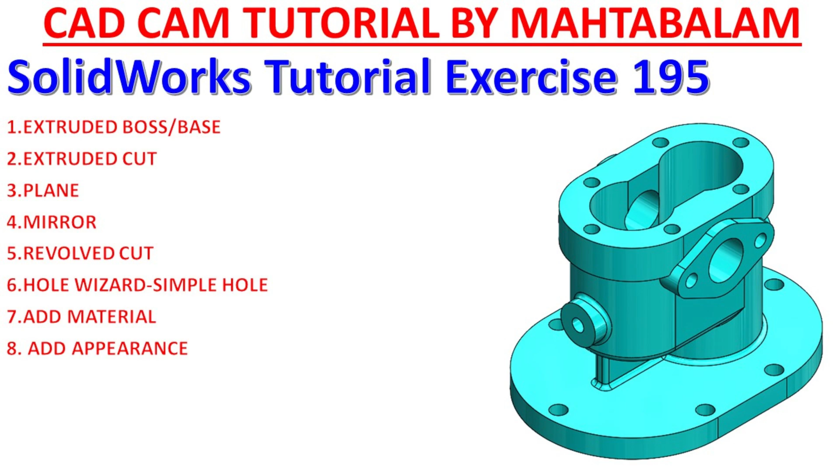Let's take one more exercise in SolidWorks. Exercise number 195. Note all dimensions are in millimeters. Fillets are 3 millimeters unless otherwise specified. Material alloy steel. Now here we have top view and right view.

So let's check top view. You will see this outer flange, radius 75. This is a kind of oblong body, and you will see the center distance for this oblong body. You will see this center line is going to meet. Look, the center line. So 30, 30, this is going to be center of this body, from this center to this center. If you see in view, 60 millimeter, and thickness you will see here 16 millimeter.

Then there is 6 number of holes. See, 6 number of 12 diameter throughout hole. See here, and the radius for this 64 millimeter.

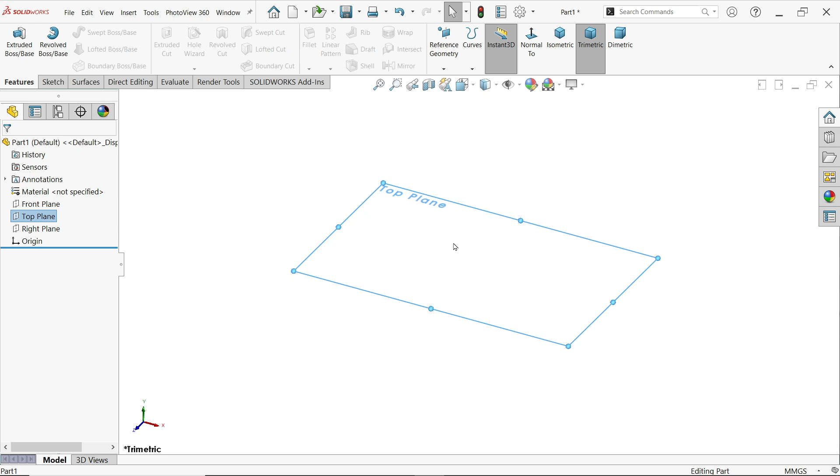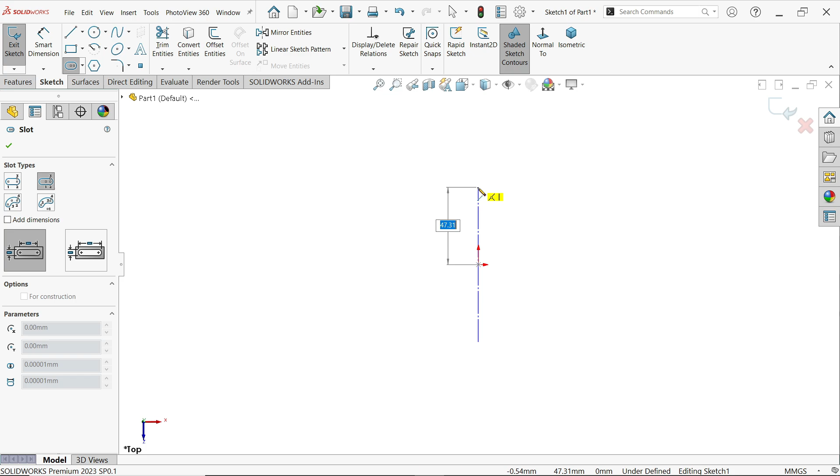Now first you have to choose a proper way, because I want to keep flange as bottom. So select top plane, sketch. Now activate here. Now we have to decide the origin point location. So I'll try to keep at center of the body. So here I am going to choose center point straight slot, and I am going to draw vertical. Drag, press escape key to out.

Smart dimension. Now these center distance 30 plus 30, 60. Radius 75.

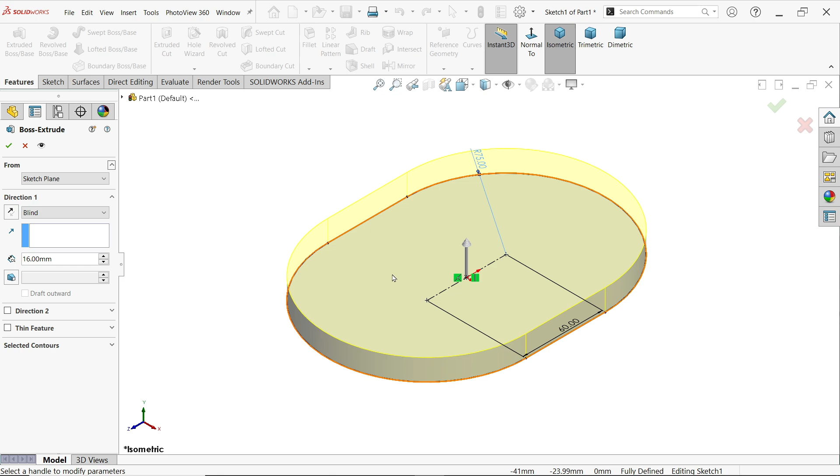Now go to feature and activate extruded boss base feature. Now look here. Keep start condition same, end condition direction 1 blind, and thickness 16 millimeter. See, this is moving upside. It's okay.

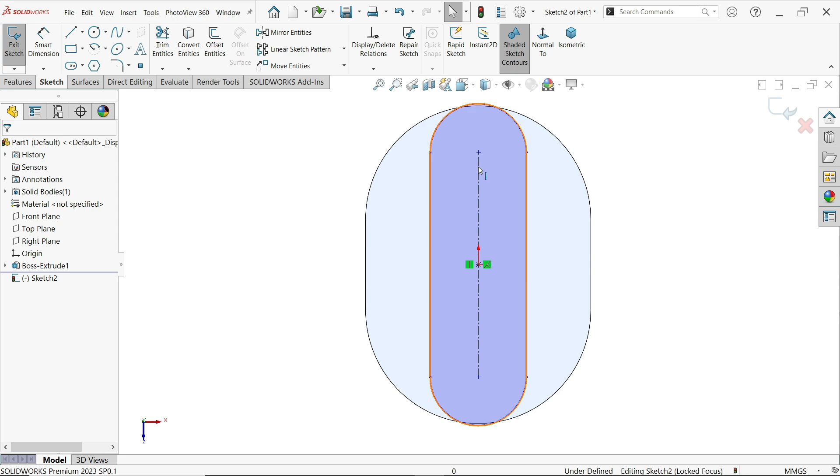Now select this face, sketch. Now again activate the same center point straight slot. Press escape key to out. Now select this one, hold shift key and select this outer one, and make one relation concentric. See, now this radius going to be 64 millimeter.

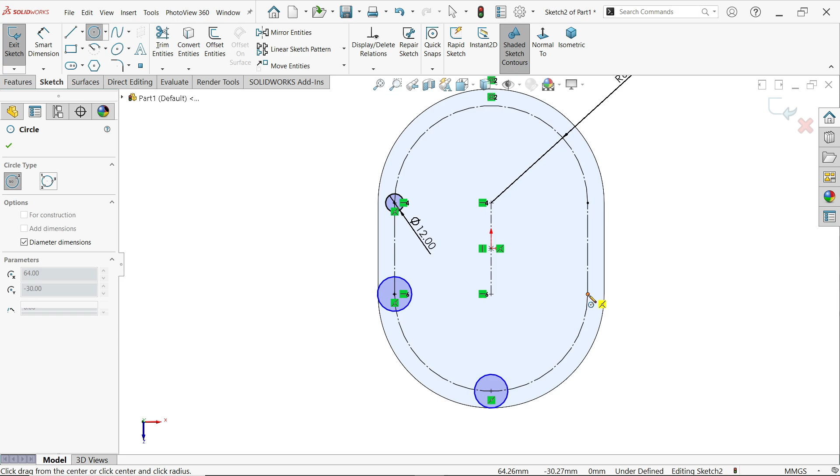Okay, now define this, select all, and here choose for construction. Okay, now activate here circle, and let me drop here, drag 12 millimeter. Okay, now just place circle at 6 location. I'm not going to use circular pattern because it creates problem, because this is not a perfect shape.

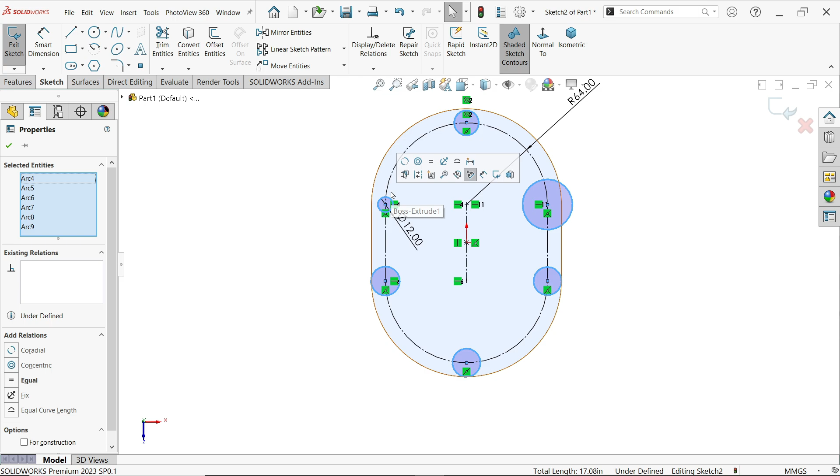Okay, now select, now hold shift key, select all the circles, and define one. And if you leave shift key, you will see this pop up, and at side you will see make relations equal. Say okay.

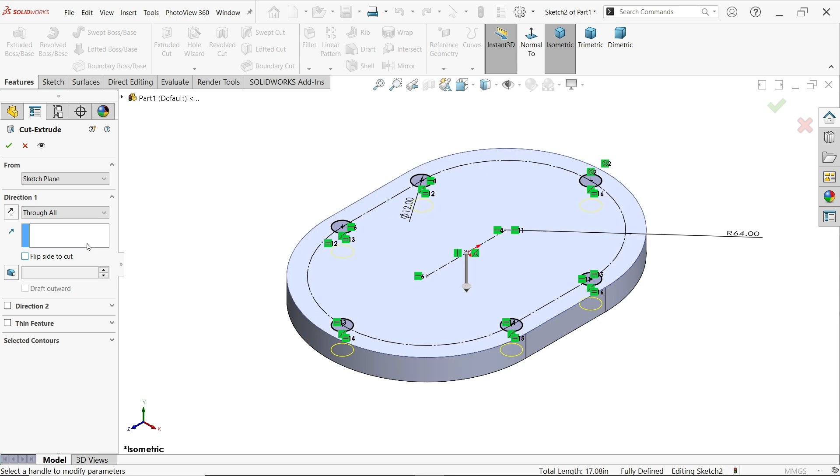Look, go to feature and activate extruded cut. Now by default system took this all. Keep end condition blind towards, even better to keep through all. Say okay, and it will cut up to through all.

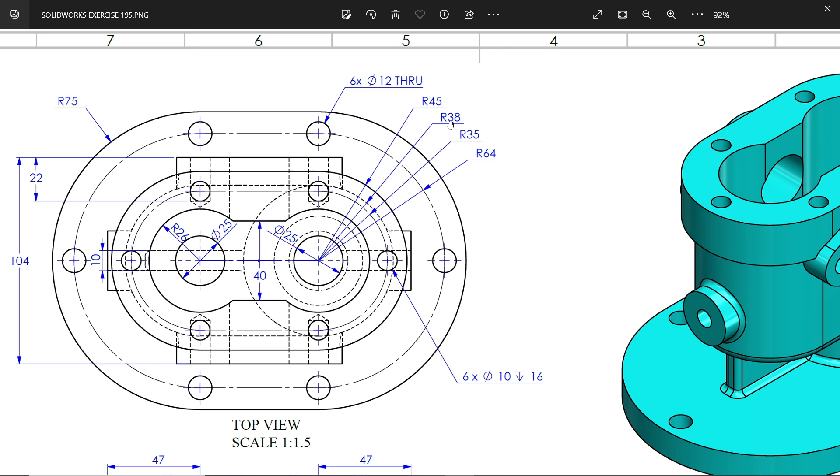At bottom 76 radius, this is going to be actually diameter. You will see from top side, you will see one dotted line. See, these radius 38 millimeter, and this is going to extrude up to from here to here. What is the dimension? 121 overall, and this flange depth 25. So if you subtract, 121 minus 25 is going to be 96 millimeters.

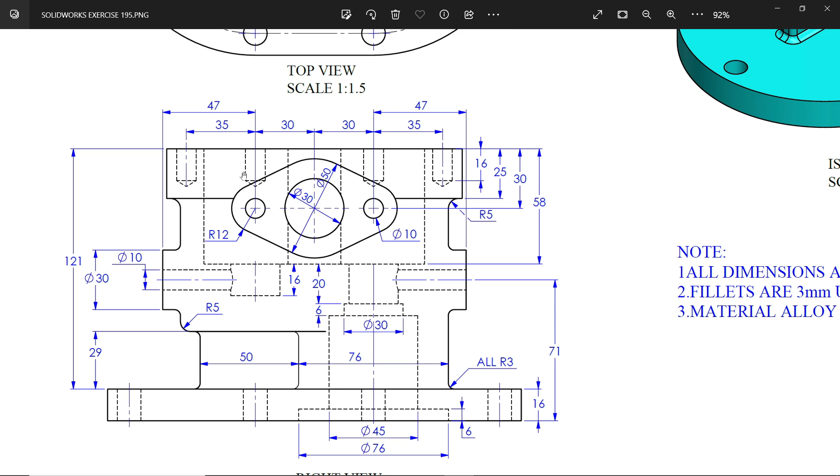See, then we will add this upper flange. See, upper flange. This upper flange, you will see this outer flange. This radius 45. Okay, and depth here shown 25. So let's do this.

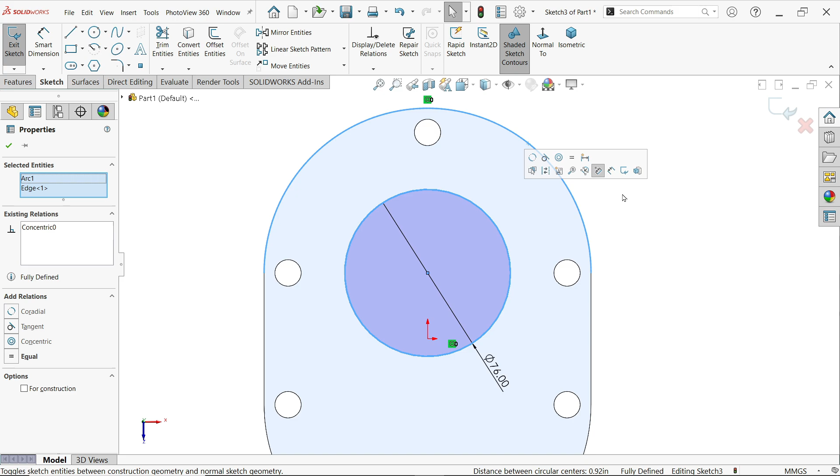Select this face, sketch. Now activate circle and draw 76, enter. Escape key to out, 76. Select this outer one and this one and make relation concentric. Okay, extrude. Now here distance 121 minus 25, 95, say okay, 96 actually.

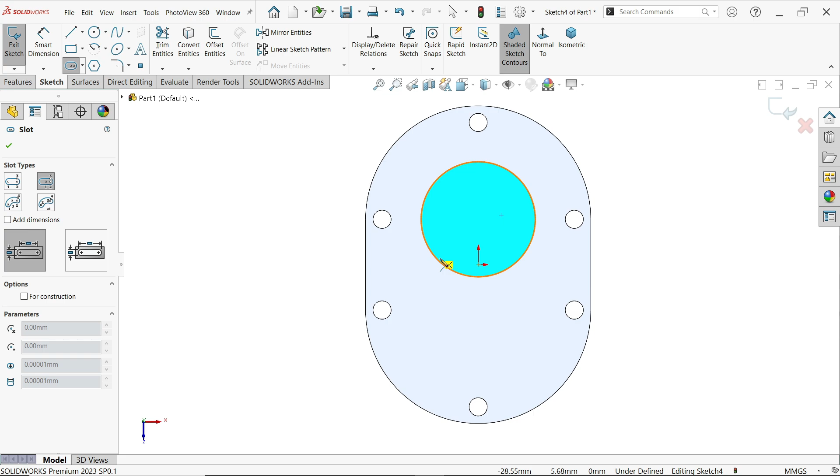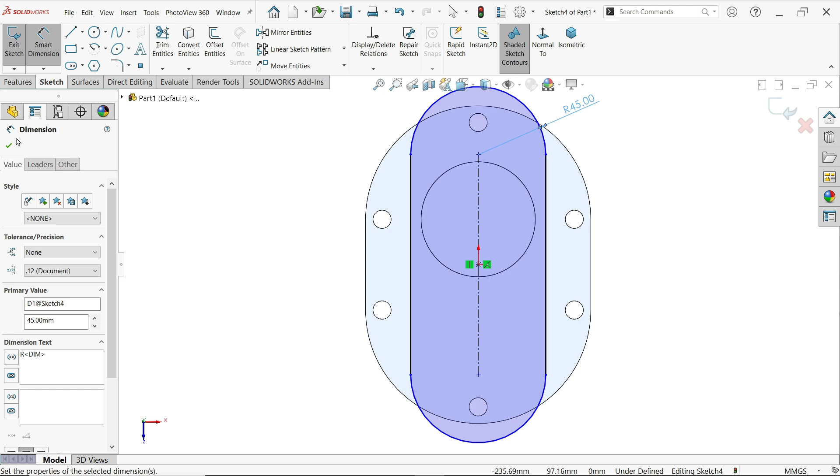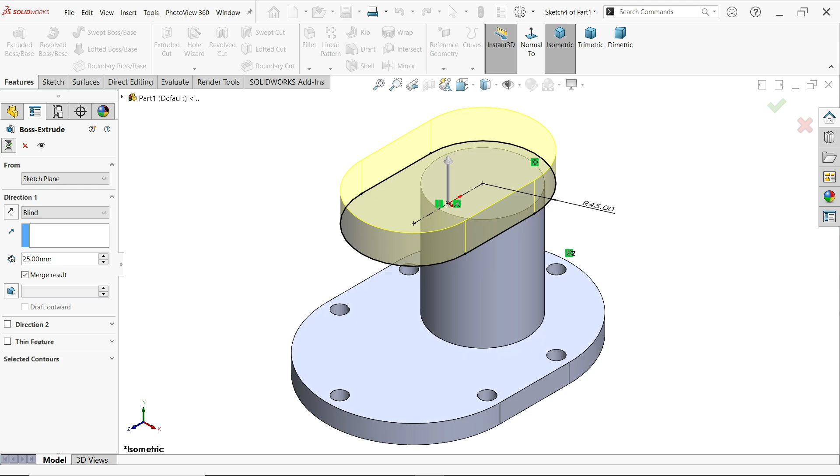Select this face, sketch. Now again I am going to select here center point straight slot. Okay, escape key to out and activate smart dimension, and the radius according to our drawing it's going to be 45. And one more important relation, hold shift key, select this outer edge and this outer edge, make relation concentric. Look, this is fully defined sketch. Extrude. And here depth 25 millimeters shown. Say okay.

Now come again. You will see at bottom 50 millimeter. This is actually a rib. If you see in top view, you will see this 10 millimeter rib. You will see this end of this shape. It's very small, but you will see with flange, with a corner fillet. See up to here. So this is a kind of flange, 10 millimeter.

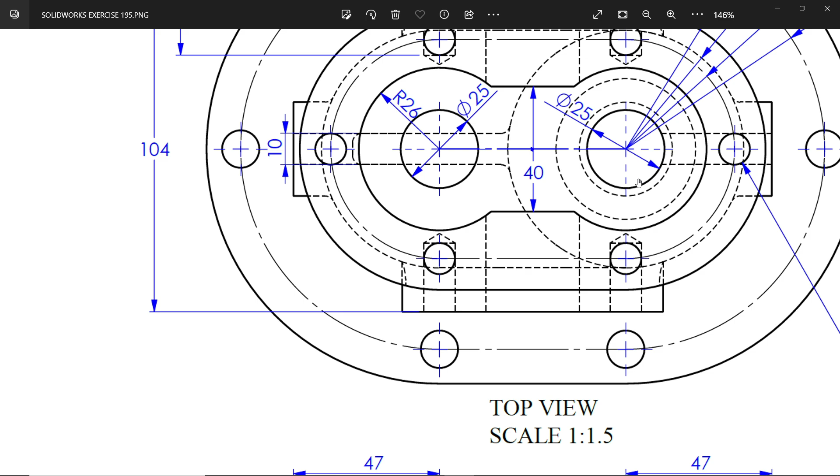Then after this there is one more body, and this is going to up to this 29 millimeter, and you will see this flange extend up to here. And those, if you clearly check, this is the dotted line, this is the body. See, this is going to attach with this outer body, which is radius 38. So remember this 50 millimeter, this rib 29 millimeter up to height, and this one second radius 38.

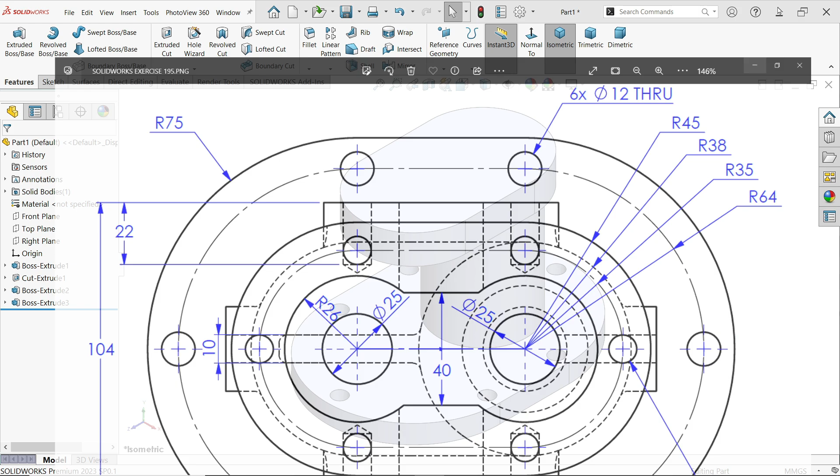Okay, so let me create one plane. Select this face, plane. Okay, now here put 29 millimeter.

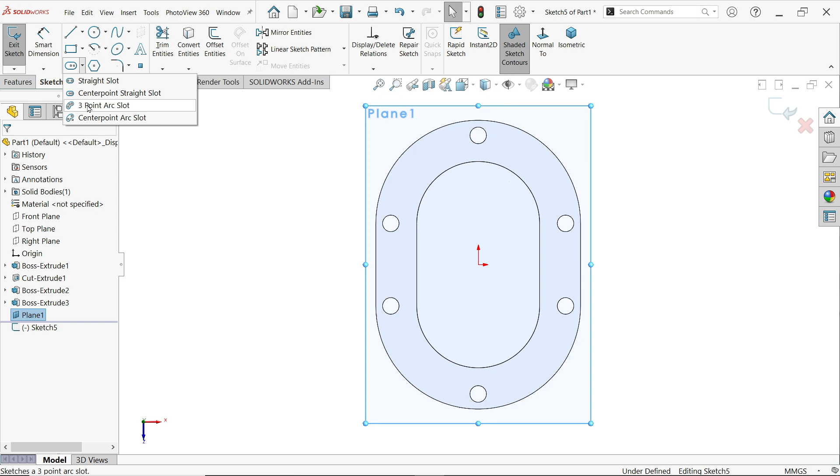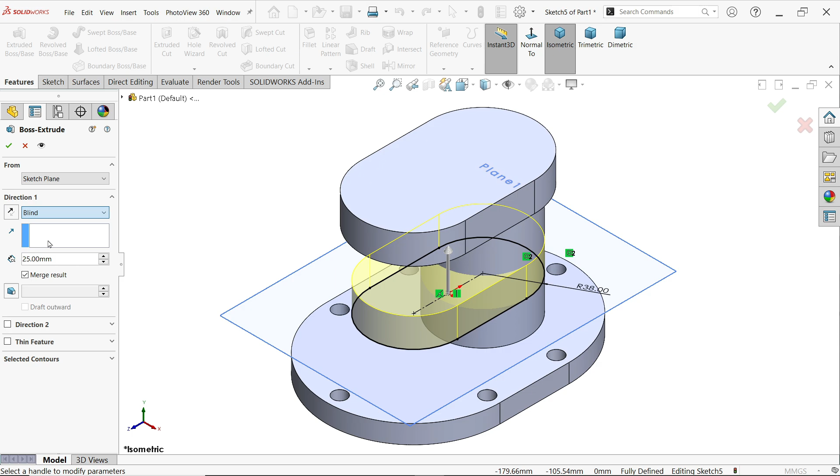Select plane and sketch. Now again activate center point straight slot. Escape key to out, smart dimension, and this is also radius 38. Now again let's select both the edges, concentric relation. Okay, now extrude. Now here select up to next, direction 1. Next means it is moving towards this direction, and the next this face.

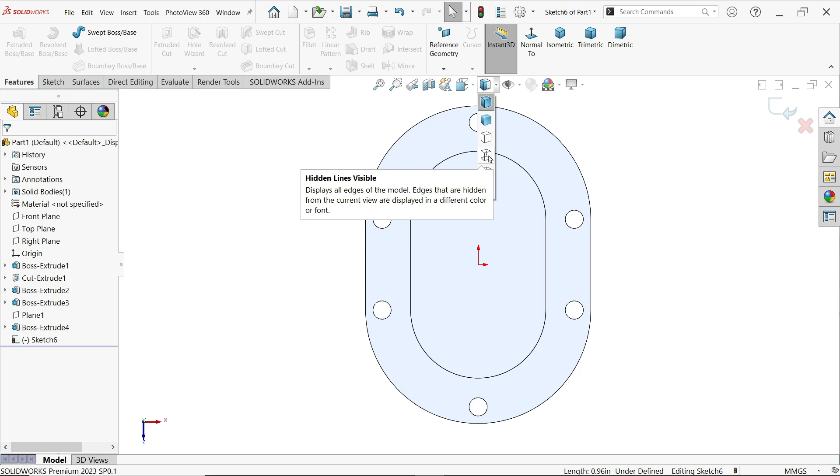See, click and hide plane. Now select this face, sketch. Now first I am going to change hidden line visible. Now here let me choose, okay, let's say corner rectangle. Okay, now let's do one thing. Hold shift key, select this endpoint and this one, coincide. Okay, smart dimension, depth or thickness 10 millimeter, and distance from the center point.

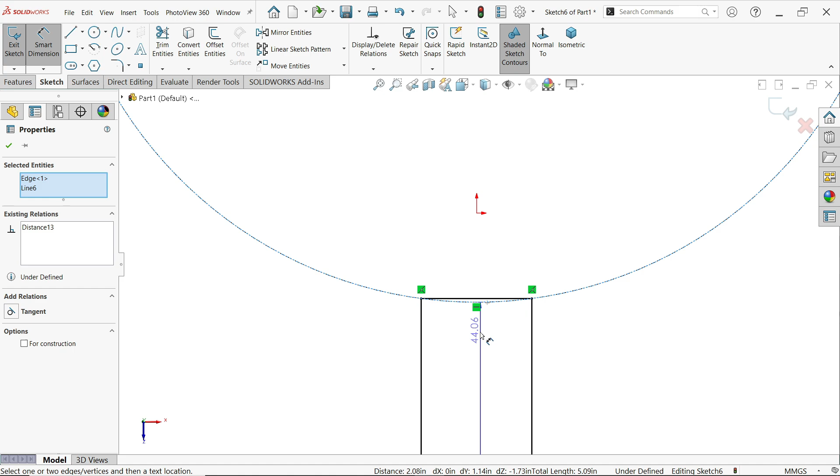Hold shift key and select this outer surface. Make sure you hold shift key, then you will get the distance from outer sharp edge, 50 millimeter. This is important distance. Don't take from upper side. Look, 50 millimeter, and this is located at center. Extrude.

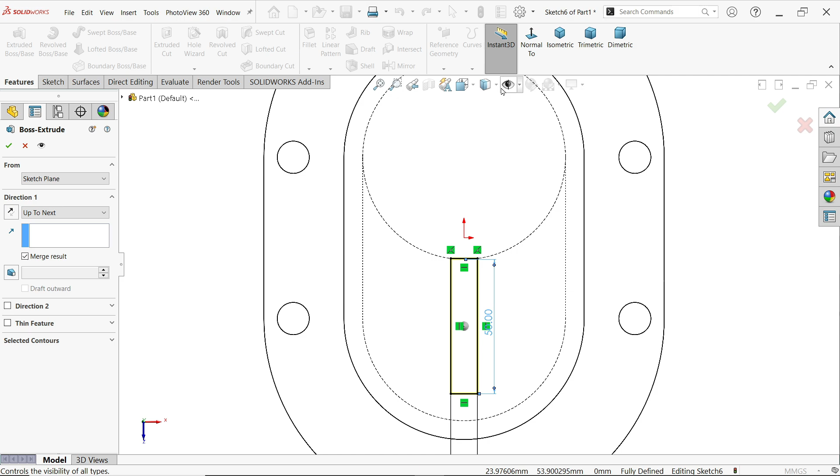Now, due to this body, this is not going to be chosen. So I am going to select up to surface and select this surface. See, this is extrude up to this surface. Make sure you merge result.

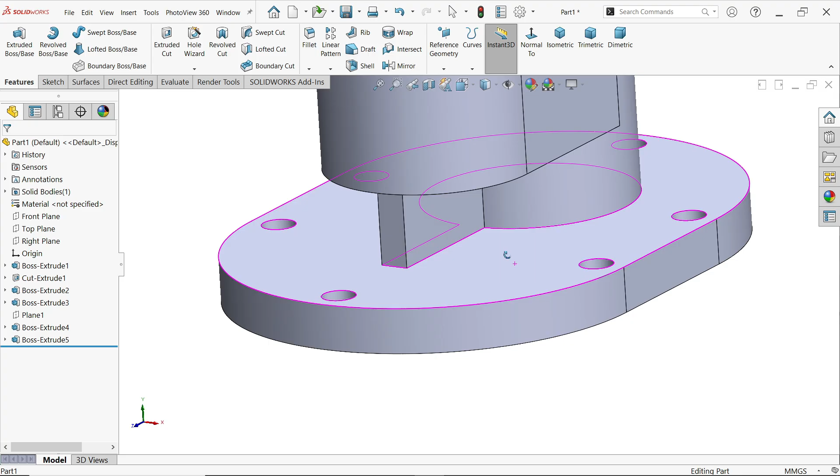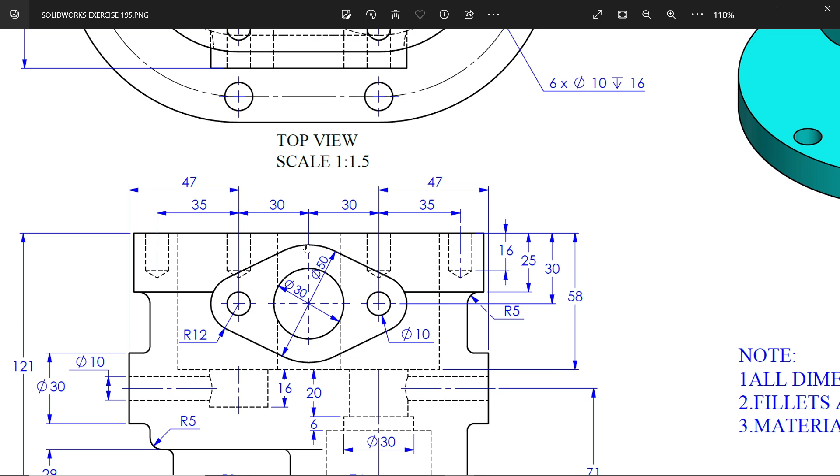You will see at top there is a cutout. Before going to take cutout, we have to make this flange. See, 50 millimeter, corner radius 12, inner diameter 10. These are we will make later, but first we will make this, and distance 30 millimeter from above, and this is located at center. And we have to see here, this is at both sides.

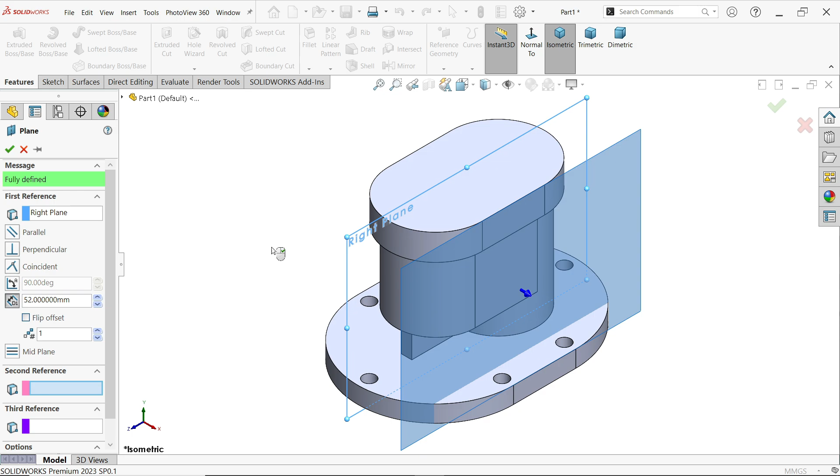Center distance 104. So first we have to create a plane. Right plane, plane, and here 104 divided by 2. Select the plane, sketch.

Now let me do one thing, make one center line. This is important. Now select the center point of this line, hold shift key and origin point and make vertical relation. Now let me define circle.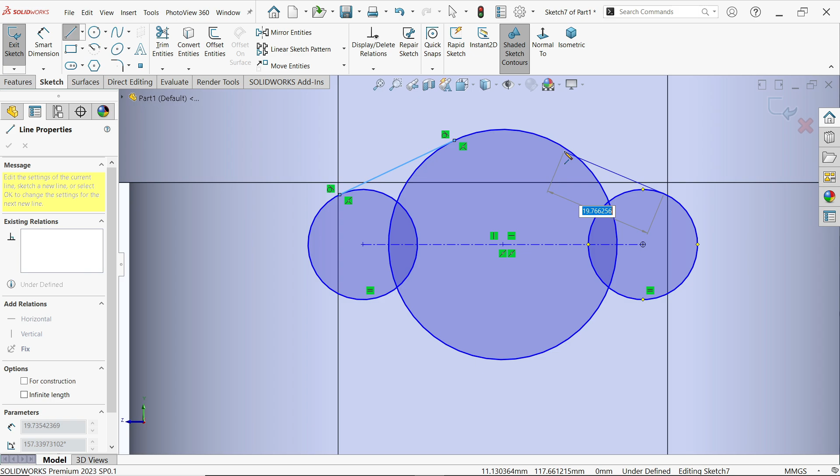Now select both circles, equal. Again activate line tool. Click and start and move cursor, and when you see tangent relation, click and exit. Again line, move, escape key to out. Mirror entity.

Now here select these two lines. Make sure we selected copy, mirror about. This is our reference line. Smart dimension, let me define this.

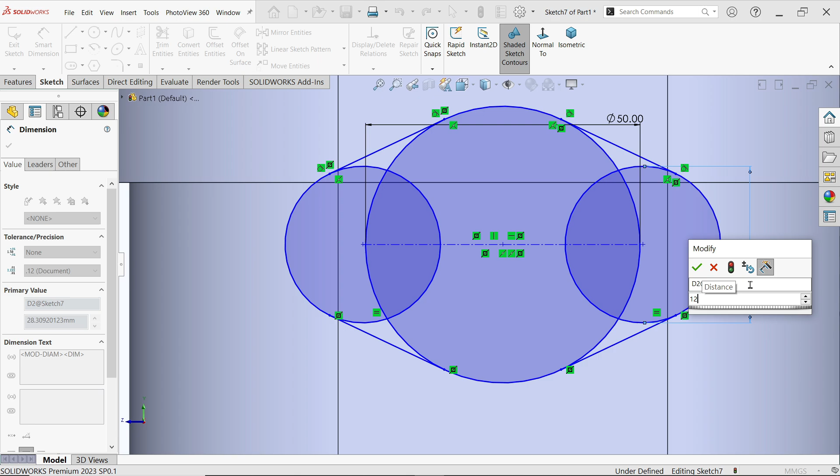Diameter 50. Now these radius 12 millimeter, so 12 into 2, 24 diameter, and center distance 30 plus 30, 60 millimeter, and this is distance from outer edge 30 millimeter. Look, this seems fully defined.

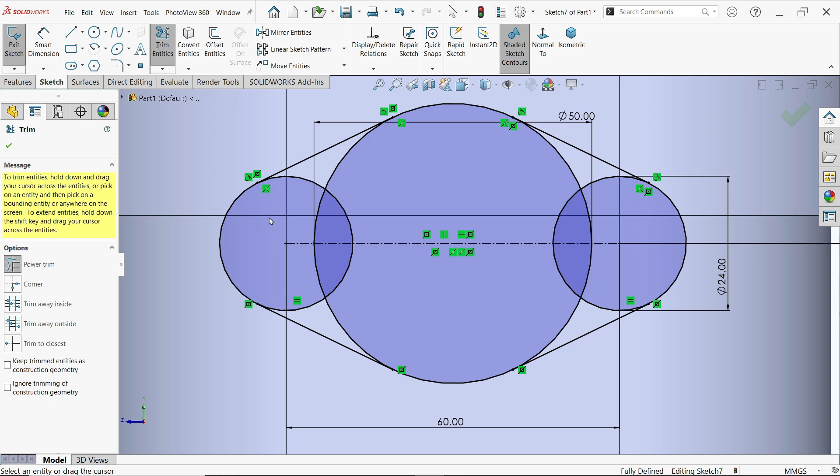Trim entity, power trim. Just press and hold left mouse and drag over the line which you want to trim. Press, hold and drag, leave. Again press, hold and drag, leave. Now we have one complete profile.

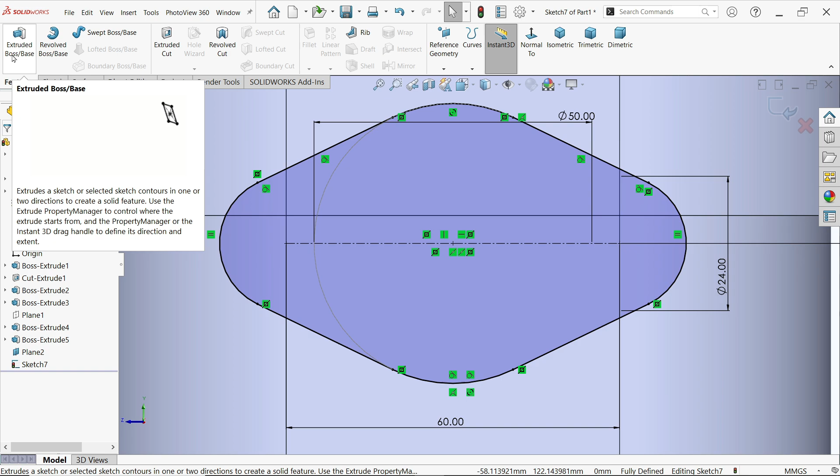Extrude. Now change direction, so here flip direction. Up to next, this is our body, up and down, so it will move up to this surface. Hide plane, look.

Now let's mirror. Reference plane, drop down, right plane, and feature to mirror. Directly select this. Look here.

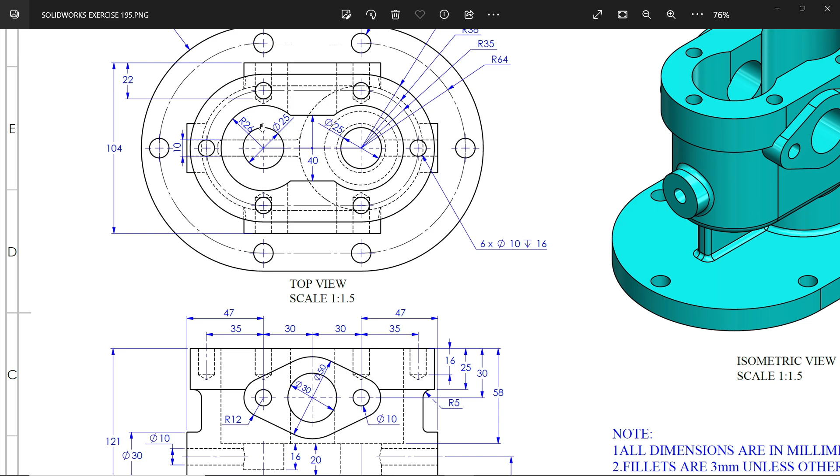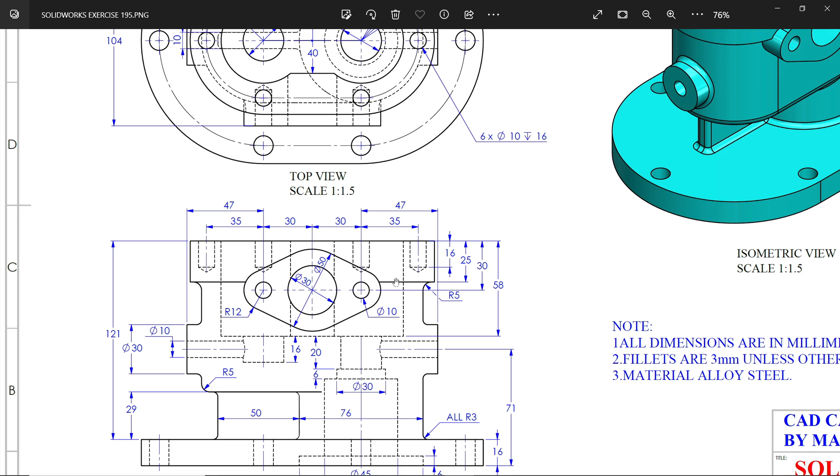Now you will see from upper side 40 millimeter, 26 radius, and this is also located at the center point. You will see a dotted line. This is a kind of cutout inside, and this is the depth, inside depth. So let's do this: 40 millimeter, 26 radius, and the depth here 58 millimeter.

Sketch. Let me do one thing, I am going to make circle. 26 radius, so diameter going to be 52.

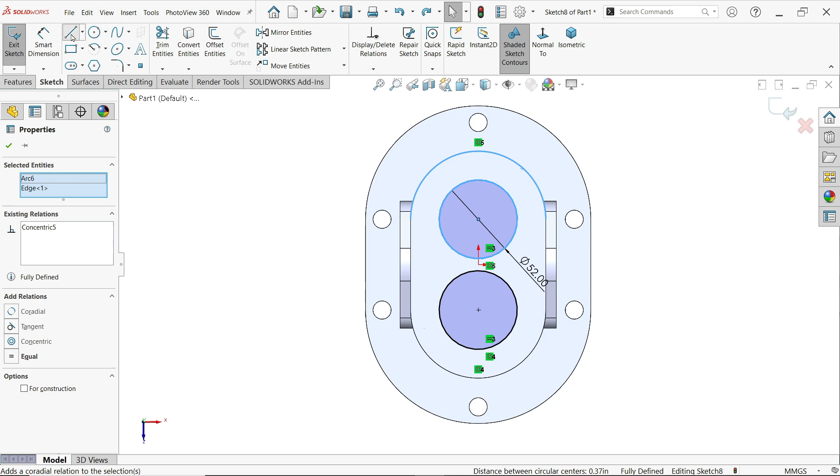Make relation concentric. Undo. Make relation equal. Then press and hold shift key, select these two edges, concentric. Similarly for other side, concentric. Activate line tool, draw one line.

Now I am going to draw one center line for reference purpose. Make sure it is vertical. Now select both the lines and click mirror entities. See, this is directly mirror.

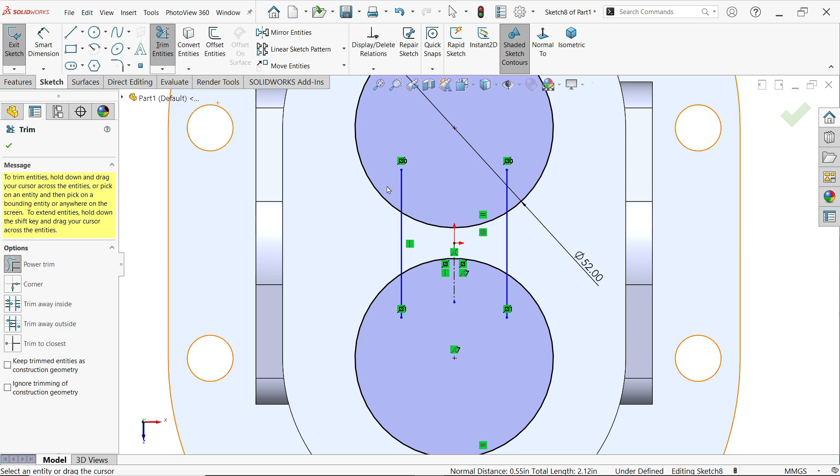Trim entities, power trim, press and hold left mouse and drag. Now let's define the center distance, 40 millimeter. Okay, this is unbalanced, so let's define half of the 40, 40 divided by 2, it's 20. Now this is balanced, this is fully defined.

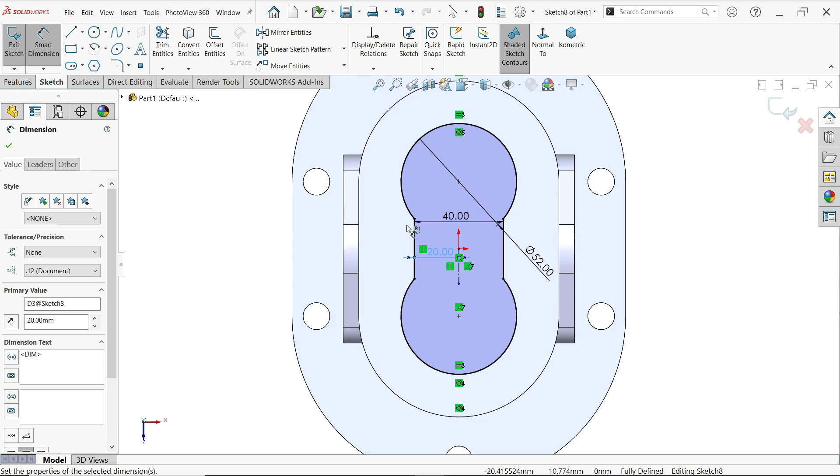Activate extruded cut feature. Now depth is not through all. Keep end condition blind, and depth according to our drawing it's 58 millimeter. Say okay, see here.

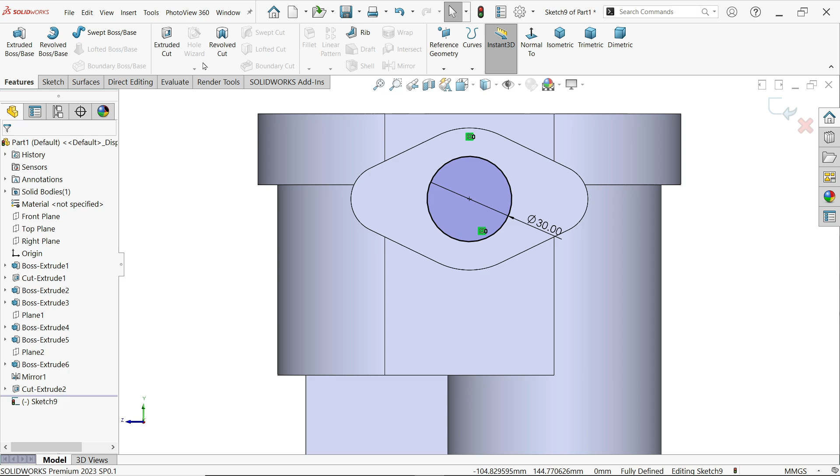Select this face, create a sketch. Now here we have one through-hole, so I am going to create one hole, and this diameter was 30 millimeter. Select this outer edge, this one, concentric relation. This is fully defined sketch. Again activate extruded cut, and this time I am going to choose through all.

That's it. Now at bottom we need to make some cutout. You will see here, inside there is a hole 25. Then there is a dotted line, one more hole. Then one more dotted line, this is one more hole.

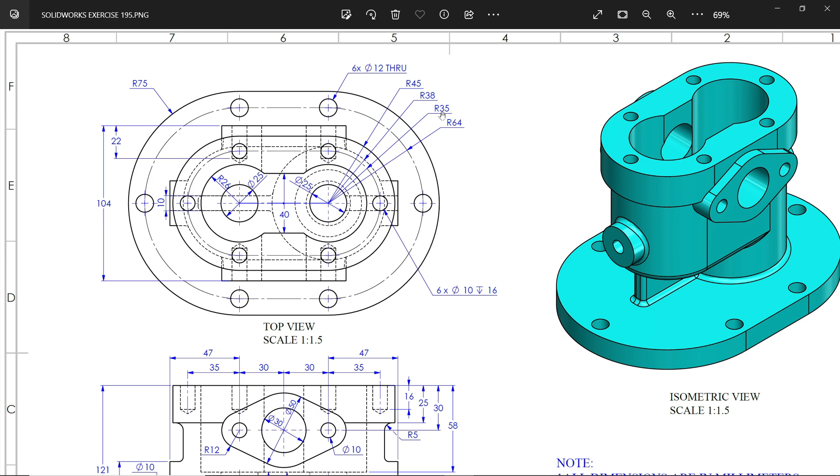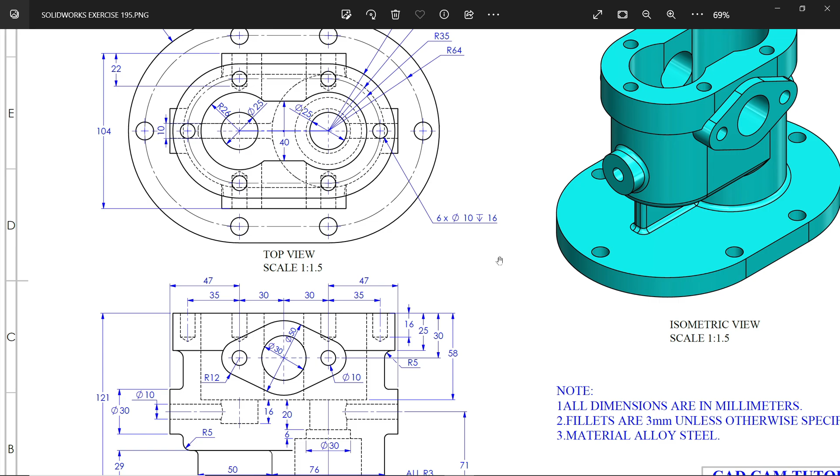35 radius shown here, see dotted line. This is the line for these holes. These hole locations, where you will find, see here these holes, 16 depth, and you will see here 6 number of holes, 10 diameter, 16 depth. This is a kind of hole. So let's make those holes.

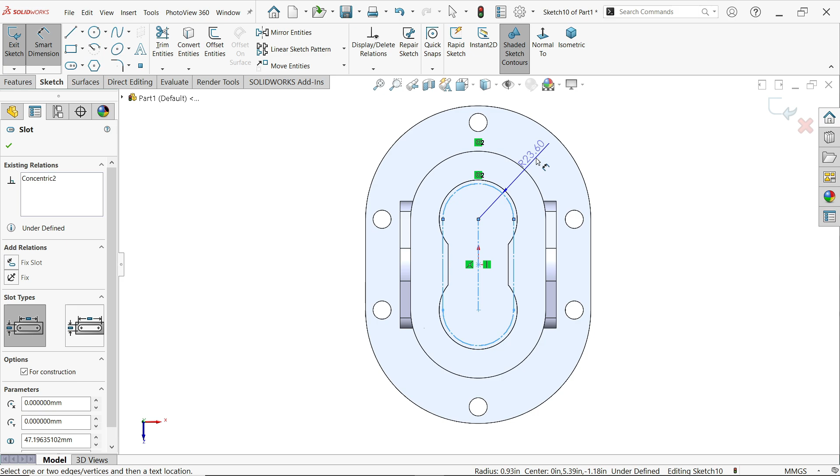Center point is straight slot. Concentric relation. Now select this and define for construction and radius. Now this radius is 35 millimeter. Now exit.

Now go to hole wizard. Now select here hole, see, this third option is hole. Standard metric, drill size, and here I am going to define 10 millimeter, even though show custom and change from here. Depth 16 millimeter, fine. Okay, rest I am going to choose depth up to shoulder.

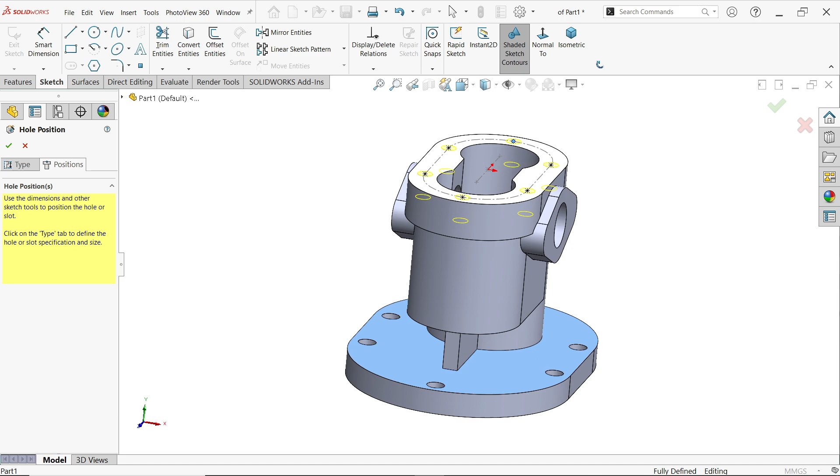Position. Now you have to choose any surface, so I am going to select this. Now see, this is activated. Just place, click and place. Click and place. Press escape key to out and just rotate, and you will see the preview. Look, the hole is created.

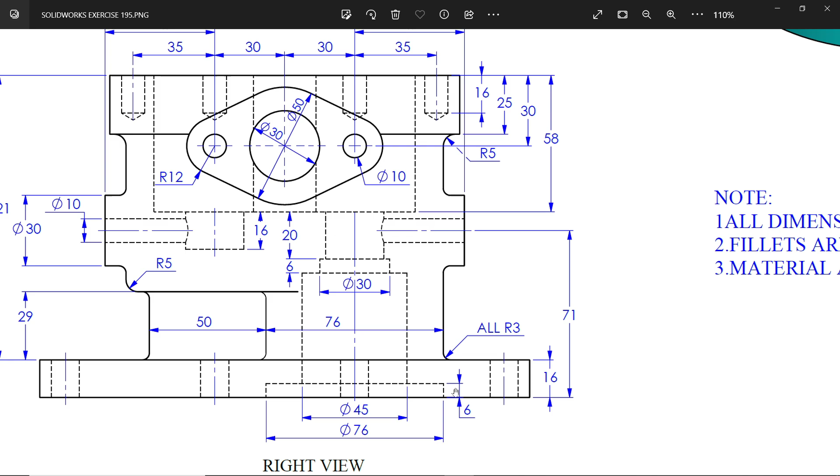Hide. Look, at bottom there is one cutout. See this diameter 20, depth 6 millimeter, 30 millimeter this diameter, and this diameter 45, and the outer one 76, 6 millimeter from here, and this diameter you will see from top 25. So let's make those first.

Right plane, sketch. I am going to choose this one. Now you will see dotted line, center line. Just create one center line.

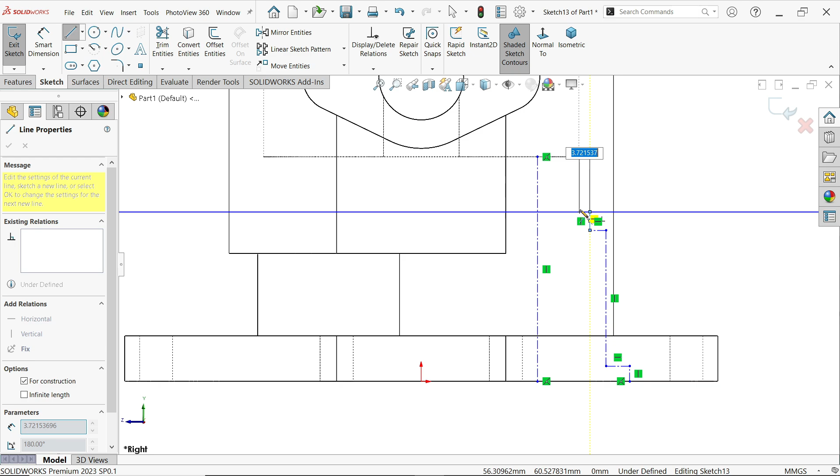Connect with this and connect up to here. Press escape key to exit, and do one thing: select these lines, uncheck construction for this one, and keep this one as a construction line so that we will get the diameter. Okay, let me define this diameter.

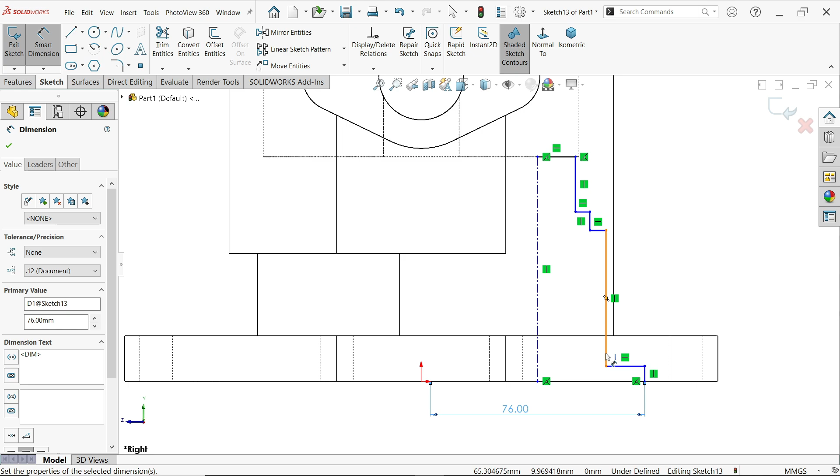If I move cursor here, 76. Ø45, Ø30, and this is going to be Ø25. Okay.

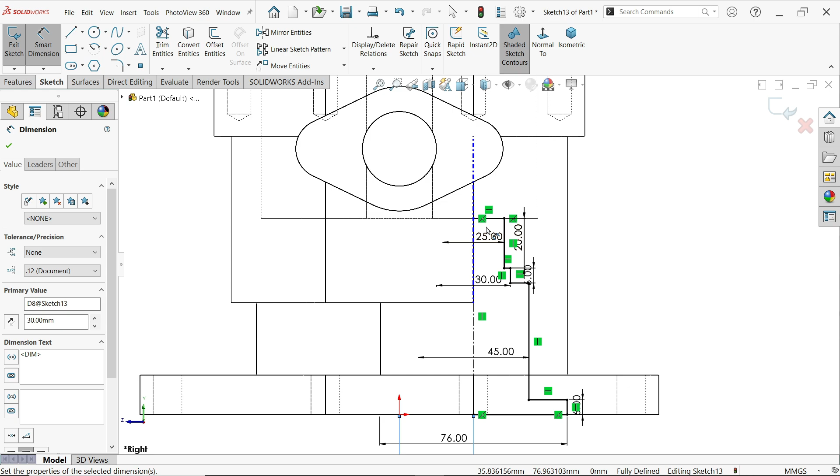Select this one, press escape key, 6 millimeter. Okay, come down, 20. This is also going to be 6 millimeter. Okay, still there is one undefined. This lies at center, so from center to this distance, 30 millimeter. Look, see this, it seems like a fully defined sketch.

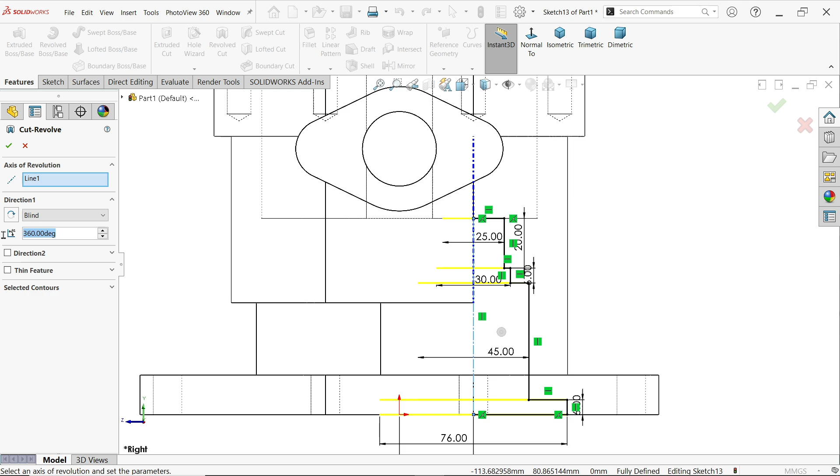Okay, now activate revolve cut. Now see, due to this construction line, this is an open profile, so it is asking you: would you like the sketch to be automatically closed? Say yes. If you say yes, axis of revolution is already detected by the system, and keep it a 360-degree cut. I am going to show you.

Okay, see the proof. Okay, if I am going to say right plane, section view. Okay, and look, this is our view.

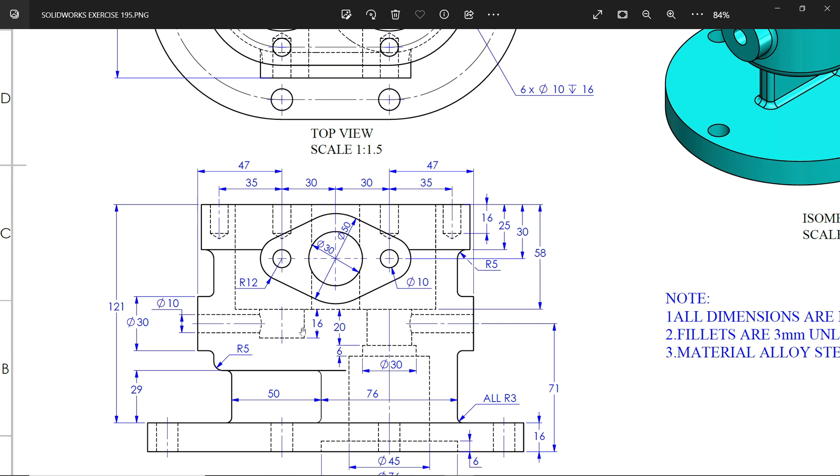Now again in a similar way, there is one more cutout, 16 depth and diameter 25. See here. Then we will make these bodies. See, 30 diameter and 47 millimeter from this end. So 47 plus 30 is going to be 77 millimeter from center on both sides. See here, and there is a hole, and this hole is going to cut up to this.

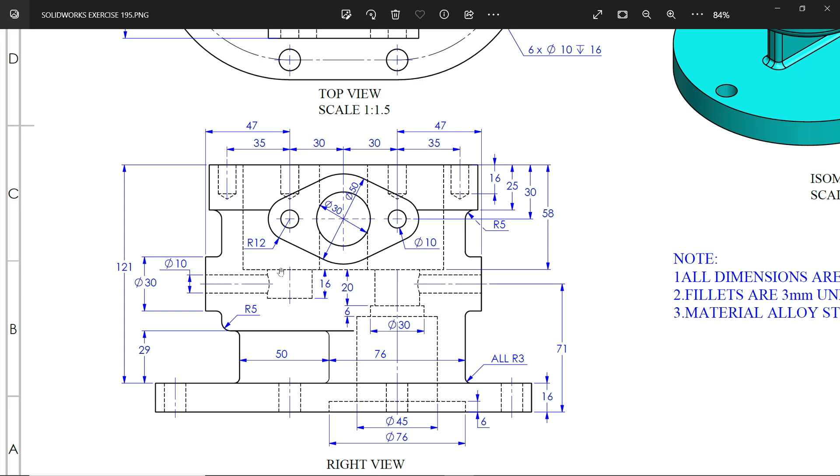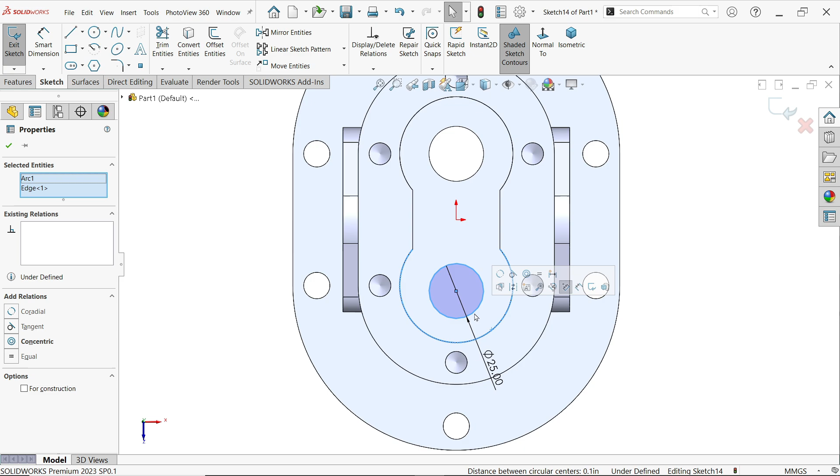So the hole we can directly make from here. Sketch, activate circle, 25, enter. Press escape key to exit and select this, hold shift key, concentric relation. See, now activate extruded cut feature.

Now see, this is moving towards downward direction. Keep it blind and register the depth as 16 millimeter. See the preview. Okay.

Let's create one plane. Right plane. Now first reference plane we choose front plane, and here we put dimension 47 plus 30. Okay, now select the plane, sketch. Now make one circle here, diameter 30, enter. Press escape key to exit, and center distance from outer edge is 71 millimeter according to drawing.

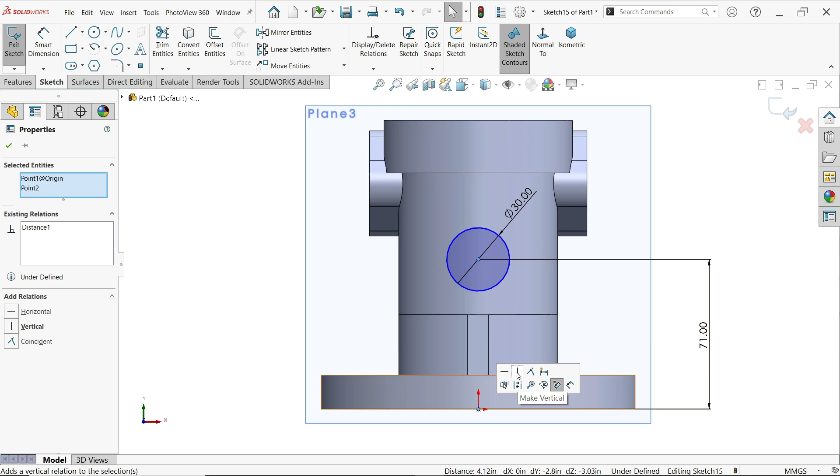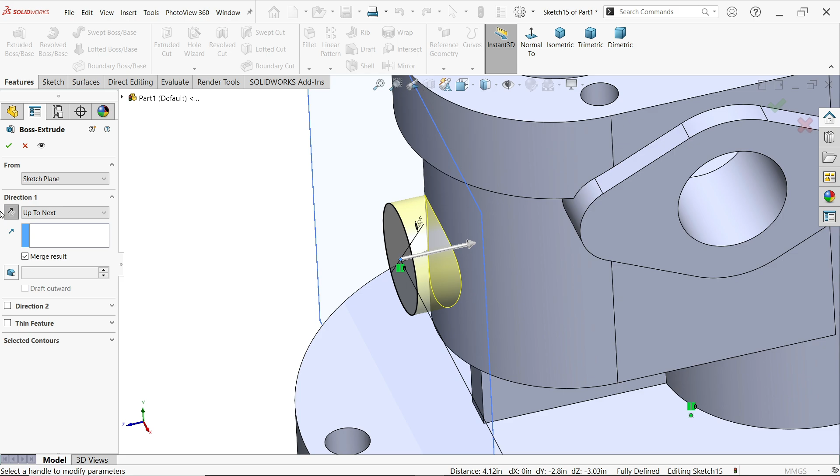Vertical. Now see, extrude. This is moving in the wrong direction. Change direction, and here choose up to next. This next is this circular face. Okay, and here we go.

Hide. Now it's easy for us to—now I want to mirror this. Okay, before going to mirror, I am going to make a hole here. Okay, let's make a hole.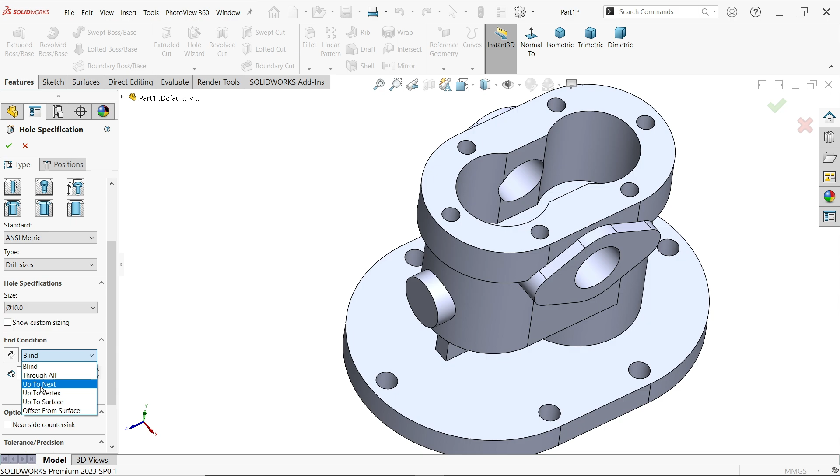Drill size is 10. Condition, I am going to choose up to next. Position, select this face, move cursor, and keep cursor outside the edge. You will see center point. Just click and place, press escape key to exit. Just check the preview. Say okay. Now look, the hole is created up to end.

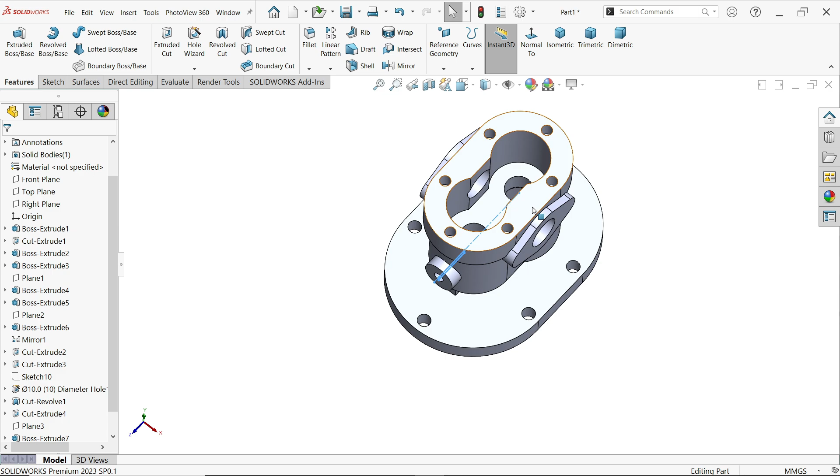Now we have to create the same way. Now let me choose mirror, reference plane front plane, and feature to mirror: select this one, and select the hole also. Say OK. Now look, it's time to choose right plane and section view. OK. Now look how our holes are created inside. See.

Okay, now let's check what else is left. Okay, there is a corner radius R5 and R5, and rest all R3. See, this corner has it, these corners have it, and see, these corners also have it. See here.

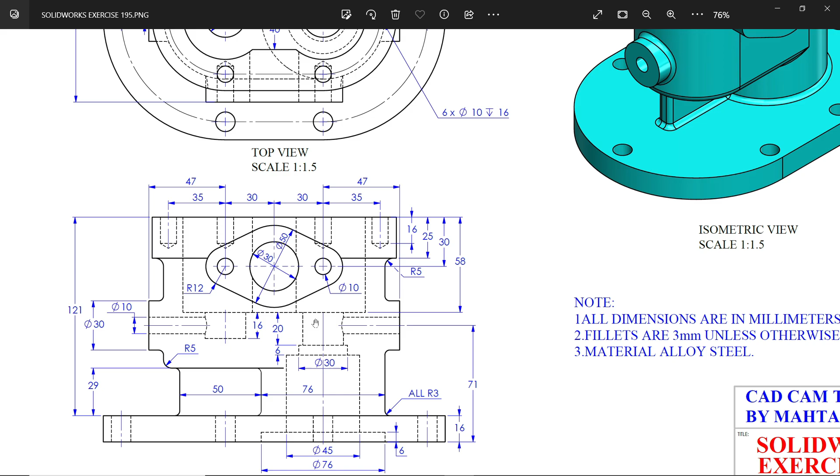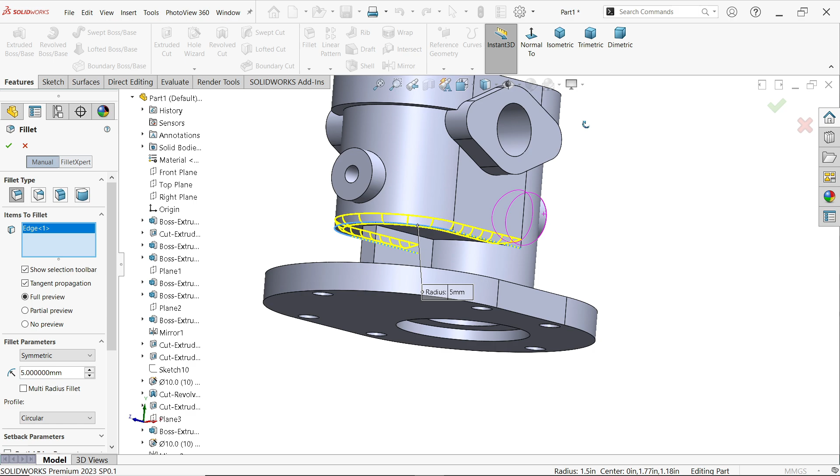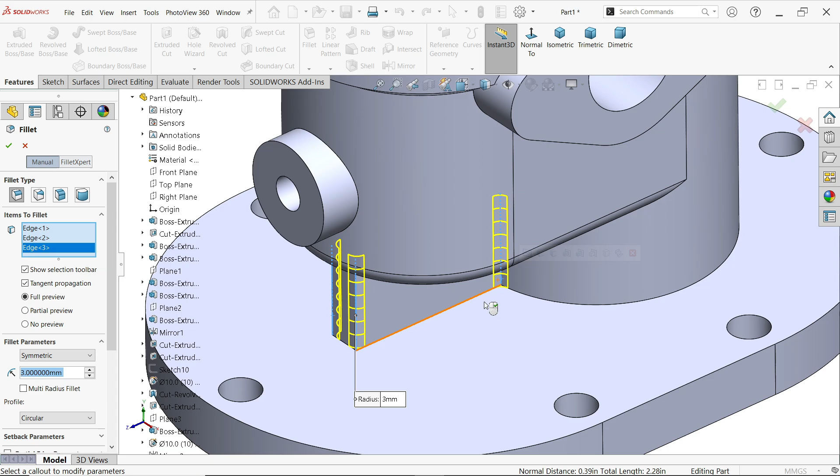Fillet type constant size, fillet parameter symmetric, and radius I am going to keep 5 millimeter, applied to this. Select this corner and this corner, only these corners have 5 millimeter radius. Okay. Fillet constant size, this time 3 millimeter, and first I am going to choose vertical edges so that the vertical edges look better.

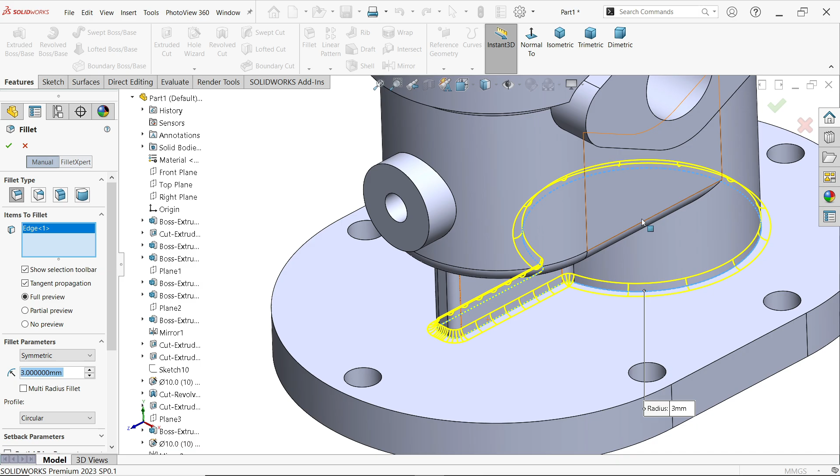Now select these corners, delete. Let's make it in a second round. Now same thing—if I choose, see this, due to this vertical circular reference, it's going to take all the edges together. Now at the bottom also, if I choose any one, see, this took all the shapes. Select this corner and this corner. Say OK.

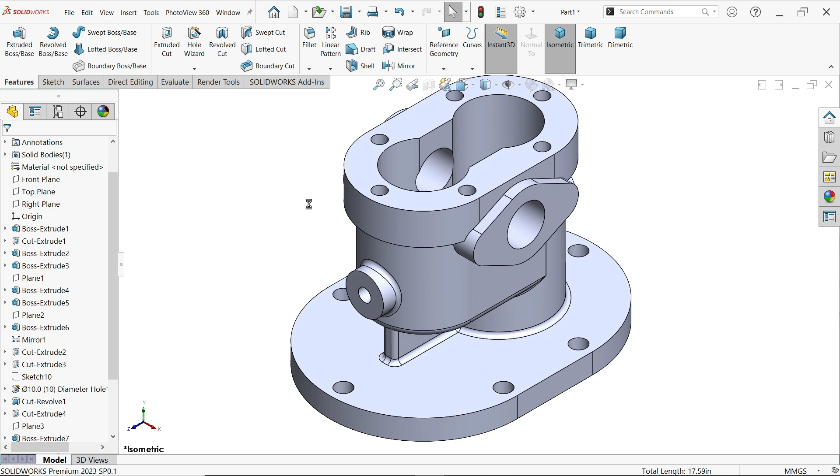I am going to turn on real view. Material, right click, edit material. From here you can apply alloy steel. See, this is alloy steel. Apply. You will see all the properties of the material. Close. And for a look, you can change appearance and scene decal. Go to appearance, normal, and here there's an option called edit appearance. Now from here I can change the color. Okay. Look.

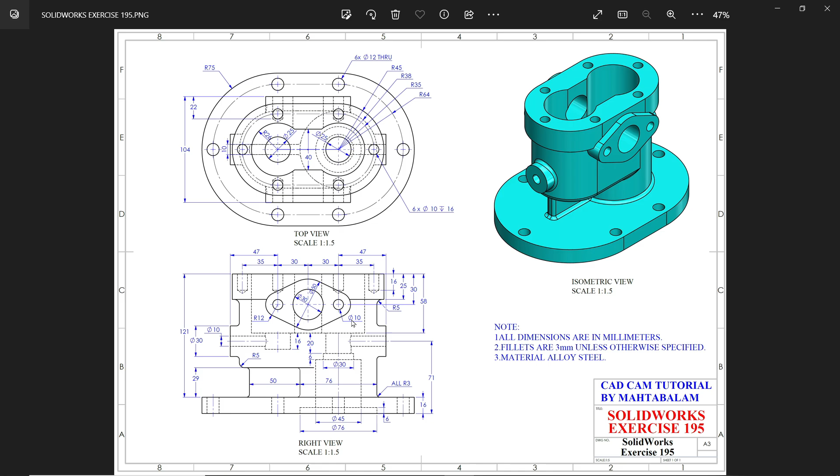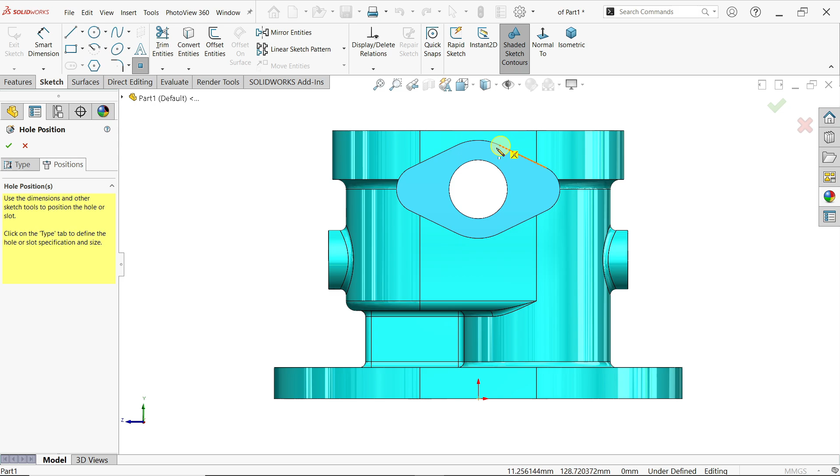So we will mirror first. We will go to hole wizard, hole metric, standard metric, drill size 10 millimeter, and depth here we need to define as 22 millimeter up to shoulder. Position, now select this face, move cursor. If you keep on edge, you will see center point. Just click and place at center point. Press escape key to exit. See, this is not up to through all.

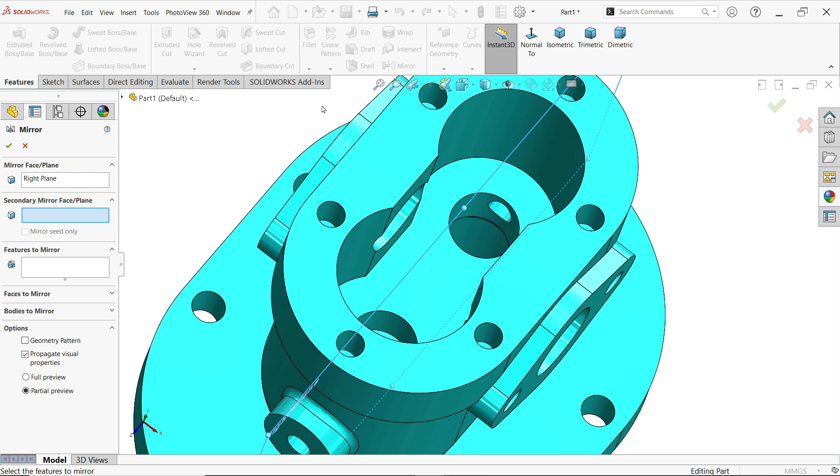Okay, look. Right plane, mirror. Reference plane selected, feature to mirror, let me choose this. Okay, see.